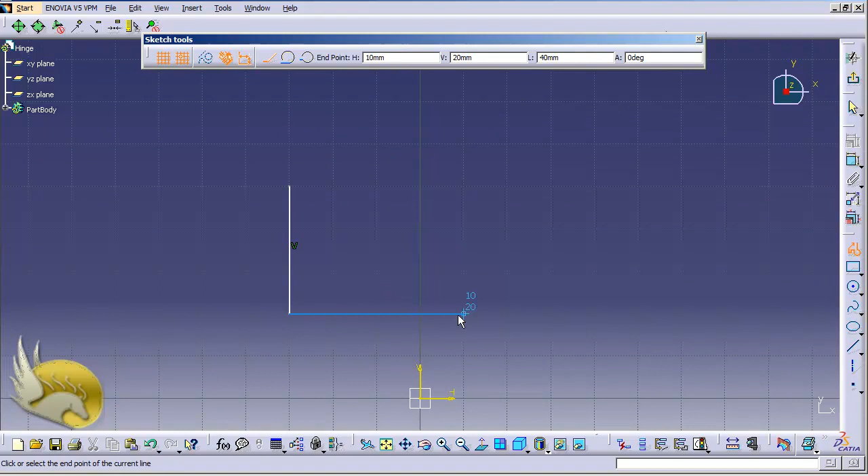Now the next part I want to create is the hinge. So I go to Part Design and rename it to hinge. In XY plane I start drawing a simple profile that's gonna be a U-shaped profile. So let's zoom in and draw this like this. Go to right, go up, left, down, left, up, and finish.

And I want to make sure that this is about 15 millimeters. So I make it 15. And this should be 15 as well. And this line should be 12.5. So I make it 12.5. That's it. Now I want to make sure that this is 4.5.

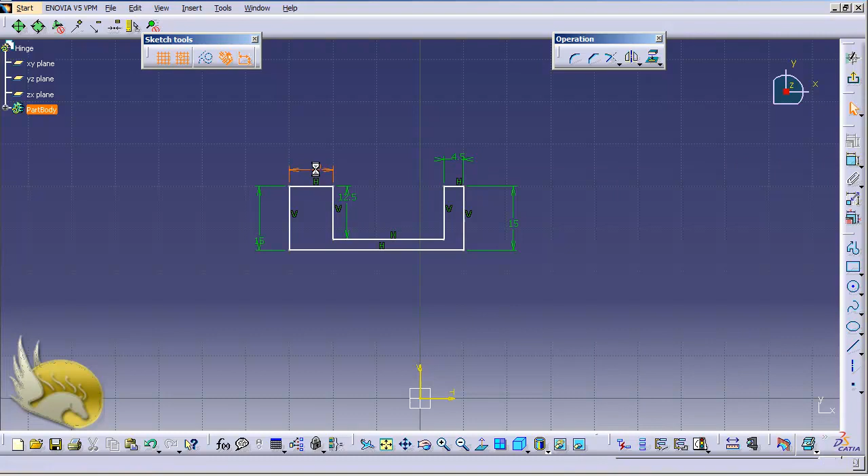The same for this one. Double click and make it 4.5. And this is gonna be only 5. So I double click and make it 5. Now the next thing is symmetry. I want to make sure that this is only 0. That means there's a coincidence.

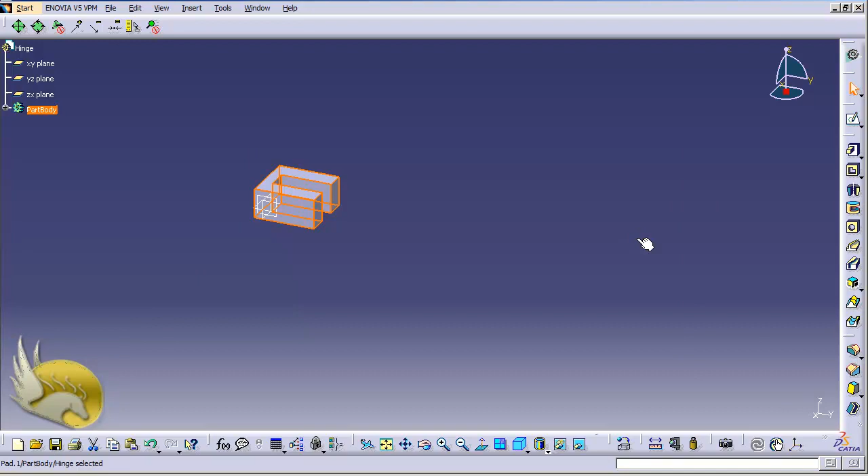And this, and this. I want to have a symmetry here. Now I click on OK. This is created like this. Exit my workbench. Add padding, and this padding is going to be about 7.5. And hit OK.

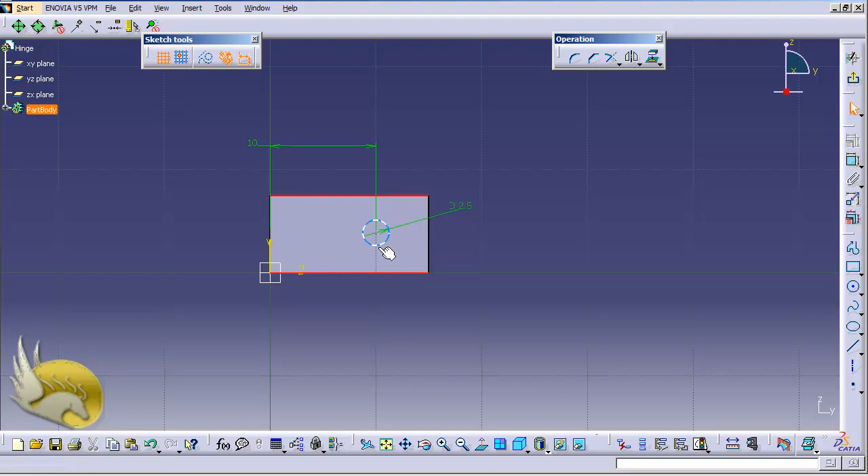And let's zoom in. And this should be 10 millimeters away from this line. So I select this point and this line and make it 10. And I want to have an equidistance between this line and this point. So I select equidistance point, exit my workbench.

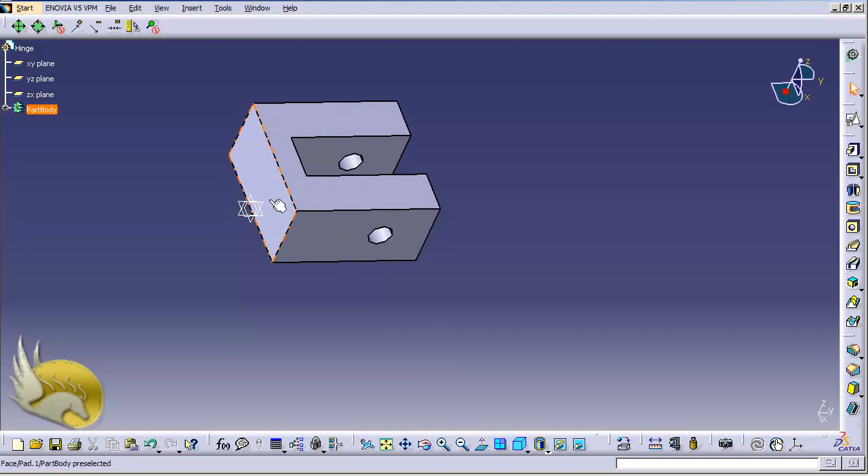I can see that I can create a pocket here, and it will go up to last. So I select up to last here, and click on OK. Okay, now I want to rotate this a little bit. Now you can see that this is like this. I want to select this bottom part, and in bottom part I want to go to sketch environment. I want to draw a little sketch.

So let's go to here, and I need 2 holes here. So let's draw a circle here. One is here. This is going to be 2.5. So I type in 2.5 here. And this is going to be 2.5 from one side and 2 millimeters from the other side. So I select this line and select this, and this is going to be only 2.

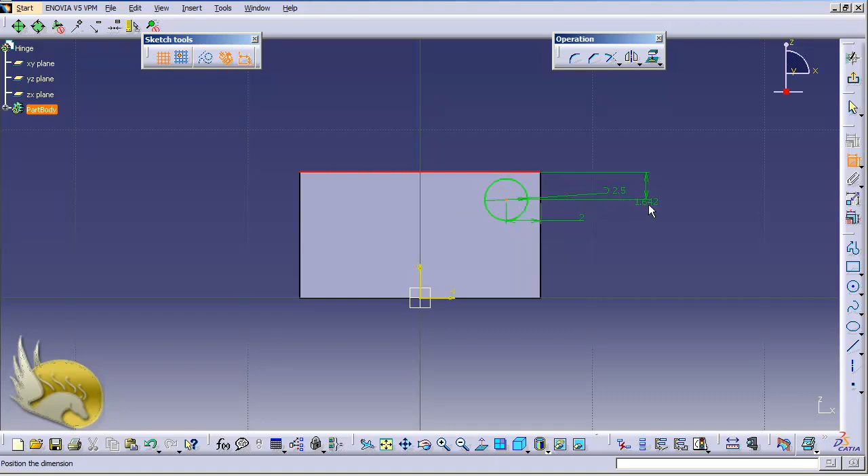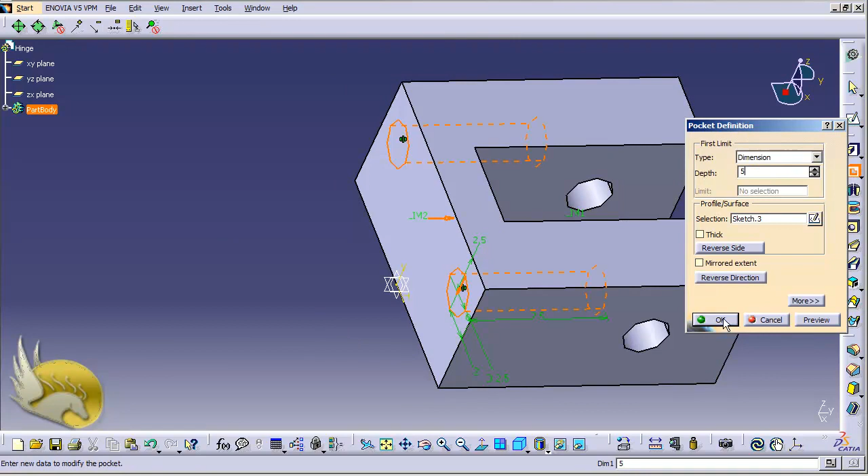And I select this line and this center, and this is going to be 2.5. And again I select this and click the mirror, click the center line, and that's it. Exit. And I need a pocket about 5 millimeters. So I select this, select dimension, and make sure that this is 5 millimeters inside. I click on OK. That's this. So I should save this as hinge. And close this.

Now I create the last part, and that's going to be the piston. And for this, again, I need to create a circle in YZ plane. Let's go to YZ plane. Again, I need to zoom in a lot because what I'm creating is very small, and this is coincident with the center of the origin of my coordinate system. This is going to be 10 millimeters in diameter, and I exit my workbench and pad it about 50 millimeters and hit OK.

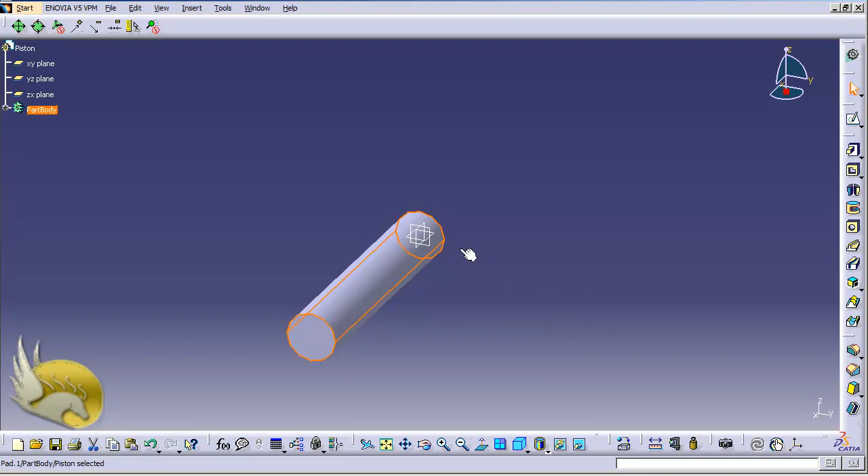Now I want to have a groove in one side, so I rotate this a little bit and select this back face. Of course I can select the YZ plane again, but I prefer to be here. So I select this back face and I'm here. Oh, no, let's exit this. I want to select one of these planes, and that's gonna be the ZX plane, I guess.

Yes, that's it. Now I want to draw a shape like this. I draw a circle here, and this circle should be 10 millimeters in diameter, of course. And I want to draw a line that goes through the center of this.

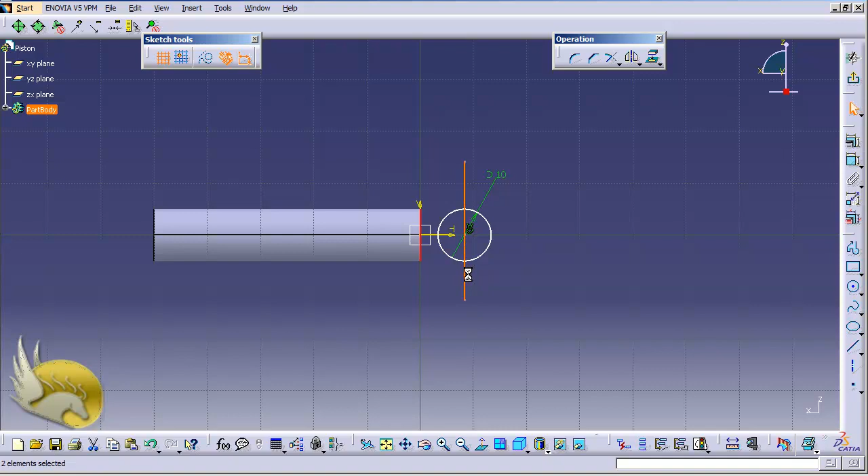And now I want this line to be about 2.5 millimeters from this line, just as I did in the previous section, 2.5. And I want this line to be in coincidence with the center of the circle. So I add the coincidence, circle is there.

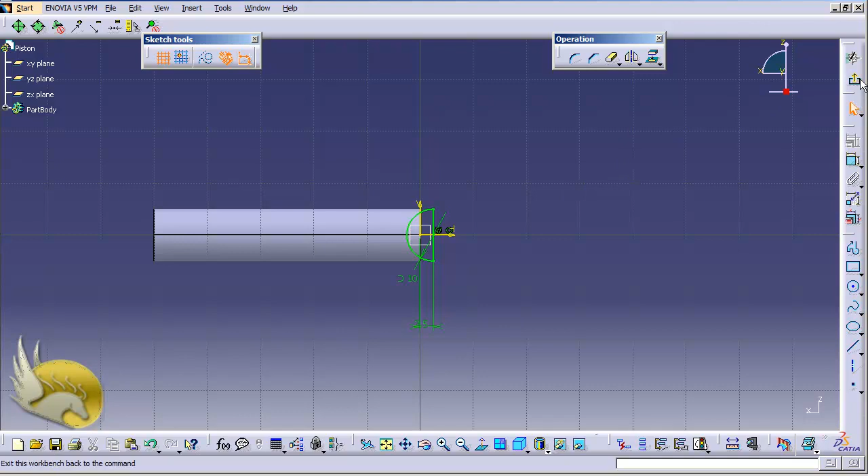Now I need to remove the excess parts by going to the Quick Trim tool, selecting it and removing this, and this. Now I need this to create a groove. So I exit my workbench and select groove. From here, the sketch is selected. The axis, I need to select the axis, 360 degrees, and I click on OK, and I can see the groove is created like this.

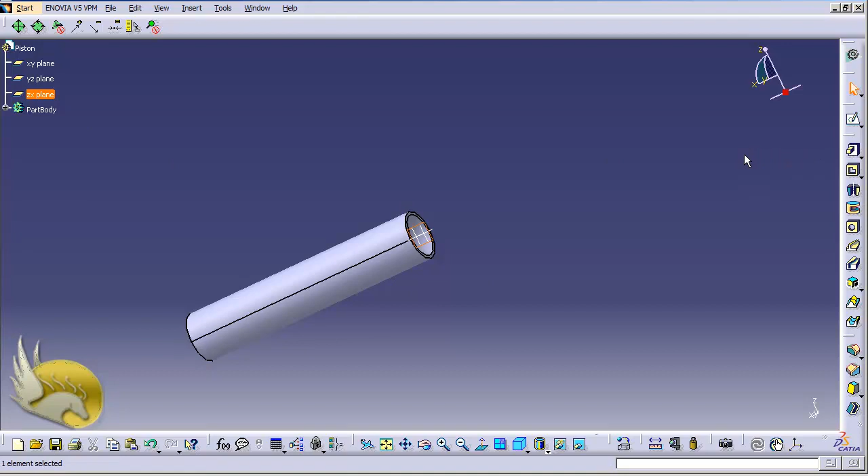Okay, now I want to go to the other side. Again, I need to select the ZX plane, and in ZX plane I go to the sketch environment, and I want to draw a rectangle here. Let's draw this like this, and then I will add a coincidence with these two lines, and this will go to the left, to the right. It should be exactly 10 millimeters in this direction, but this side is not that important. I can add any constraint here, but I just want to make sure that this is 10 millimeters.

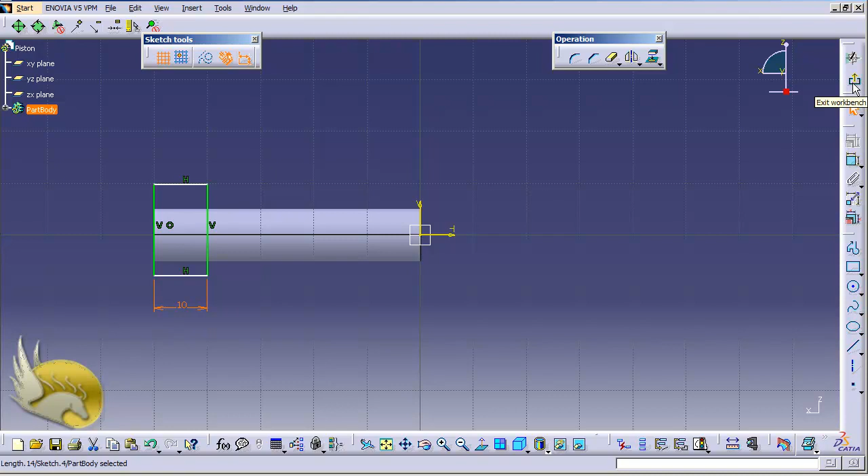So I exit my workbench, and I want to have a pocket here. And it is very important to understand what kind of pocket I'm creating here. You can see this like this. I want to have two directions. The first direction should be any number because I'm going to cut some of this. I don't touch this. This is going to be 50 millimeters and the dimension is okay.

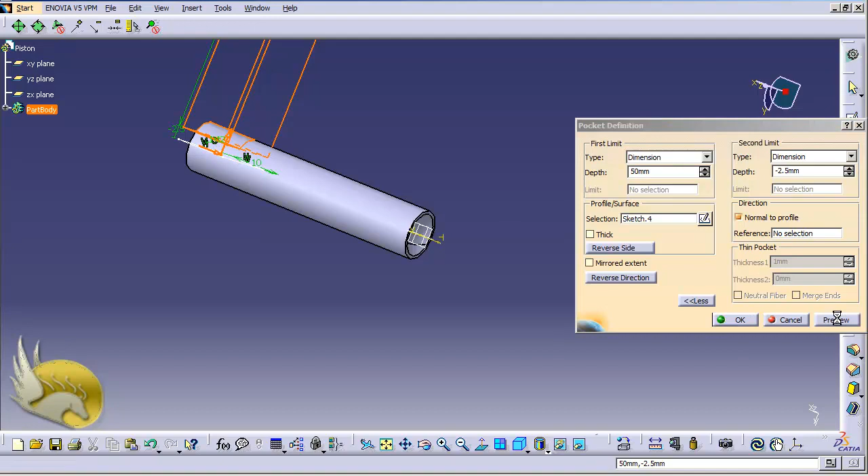The second direction should start from some point above this plane. I don't want to cut this from the middle. I just want to cut this about 2.5, and I just type in minus 2.5. And now you can see that by selecting this, I'm letting some of this remain here. So I click on preview. You can see that I cut this like this. And that's exactly what I'm talking about. Let's see this. This is exactly what I meant.

Okay, I want to have the same sketch and cut this from the other side. So again, I need to go here and select the ZX plane. Yes, I go to ZX plane and I select project 3D. Select sketch 4 and click on sketch 4. Now you can see that I have the same sketch here. I exit my workbench, and this time I'm going to use it this way.

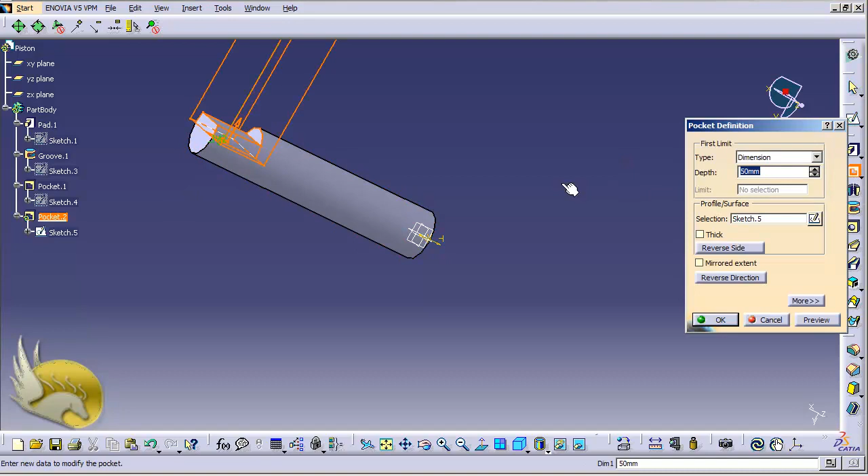So I select the pocket tool. It should be on the other side, so I click on reverse direction, click on more, and I add 2.5 millimeters. And if it is in the correct dimension, you can see that no, I need to have a minus here, so I type a minus before 2.5. Now I can click on preview, and this is exactly what I mean, so I click on OK.

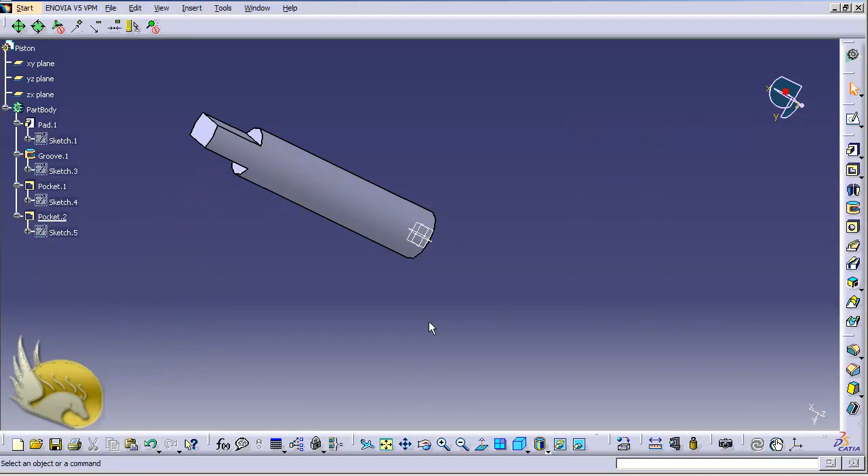So I have this, and now I want to have a hole in this face. So let's rotate it a little bit and select one of these faces, doesn't matter which one. I select this and go. Now I want to draw a circle. So I select a circle, and this circle is like this. It should be about 2.5 in diameter, and it should be 2.5 millimeters from this line.

I select the center and add a constraint, but it should be on the other side. So I type in 2.5 and click on more and click on swap location. So it is here, and it should be equidistant from these two lines. So I select this line, press Ctrl, select this line, and select this point that is the center of the circle. Release the Ctrl button and select equidistant point from this.

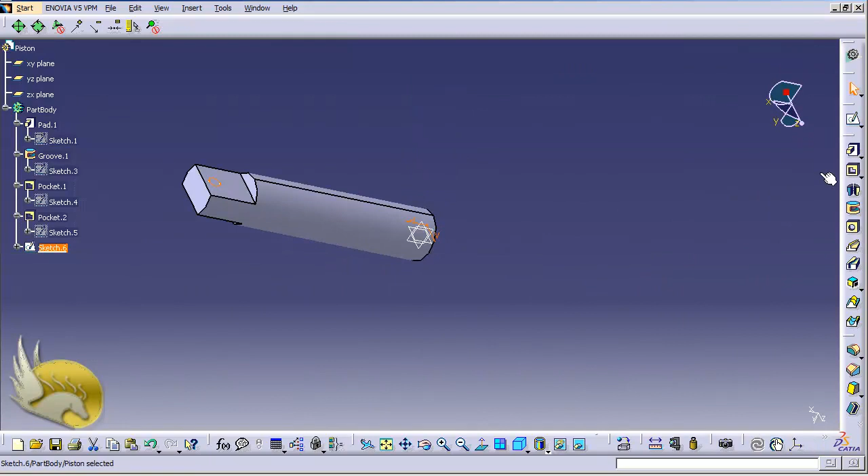So okay, that's it. So I exit my workbench and create a pocket that goes up to last. So it should be selected up to last. Now the direction should be reversed. So I click on this, click the preview. Now I can see the hole like this. That's it. So I have created all parts.

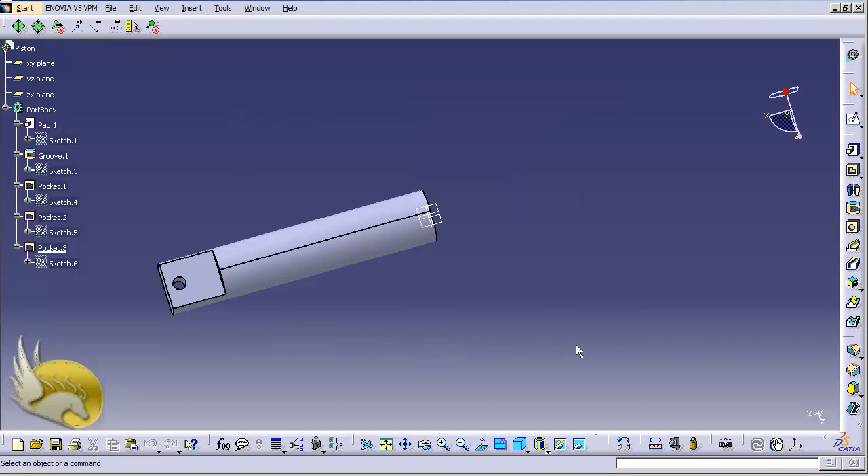Now I will save this as piston. Now in the next section I want to assemble all these parts that I just created.